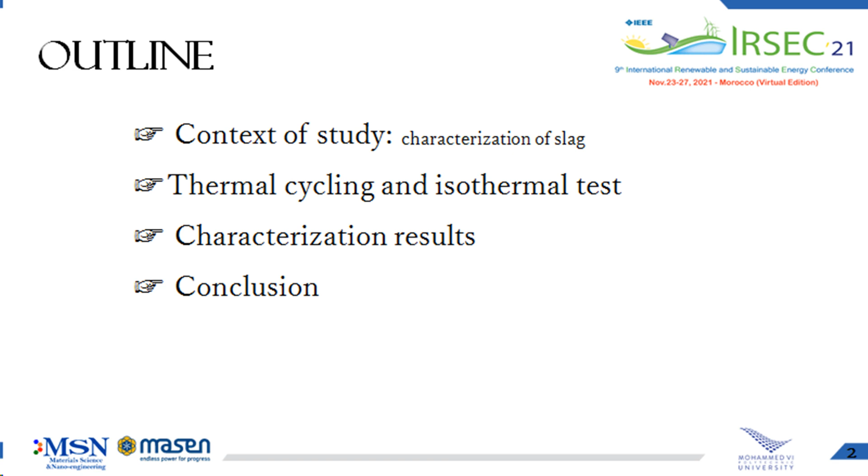First of all, I'm going to share with you the outline of my presentation. I will start by the context of study. Then I will pass to thermal cycling and the isothermal test. Then I will present the characterization result and finally a conclusion.

Thermal energy storage using sensible material is widely used to match the production and the demand on energy. In this regard, several researchers try to use byproduct materials such as slag as sensible material because it's available and low cost, and checking their thermal and mechanical stability for the cited application is mandatory, and our work stands on some uncovered points after thermal cycling of the material.

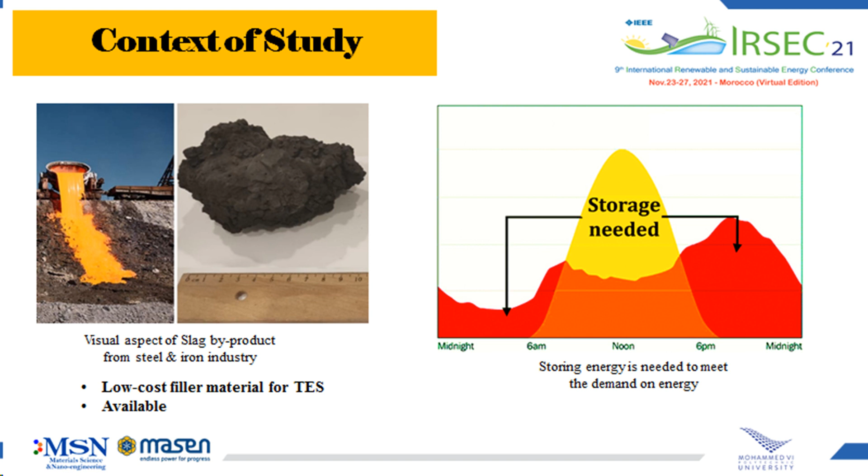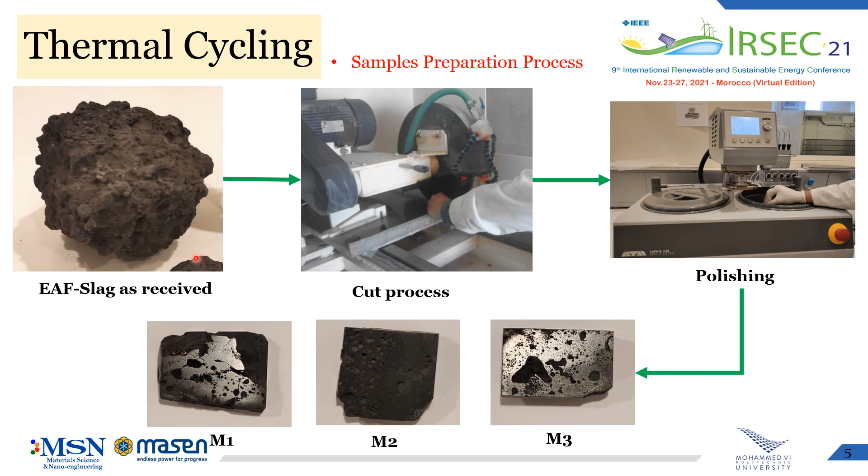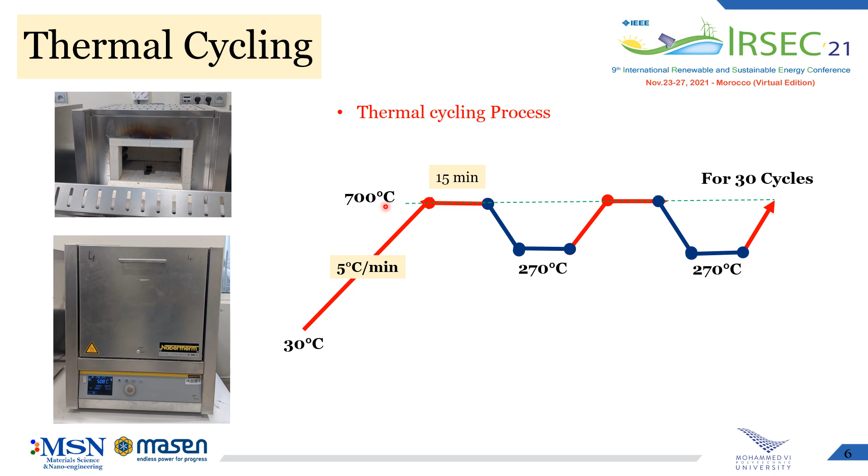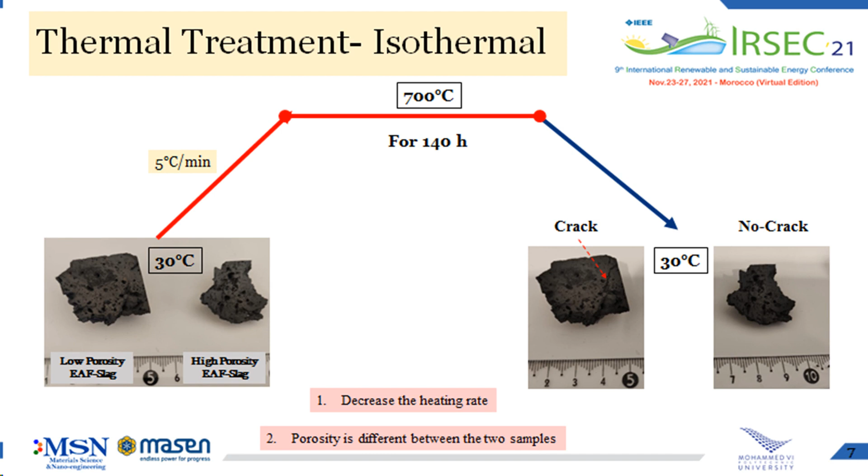In the second study, we have performed an isothermal study for 2 different porosity samples at 700 degrees C for 140 hours. The results show that one sample has cracked while the other with the high porosity doesn't crack. We can conclude that the heating rate is too high and causing the pressure increase of gases inside the material which leads to the cracking. Therefore, porosity beside the heating rate has an influence on the thermal stability of the slag material.

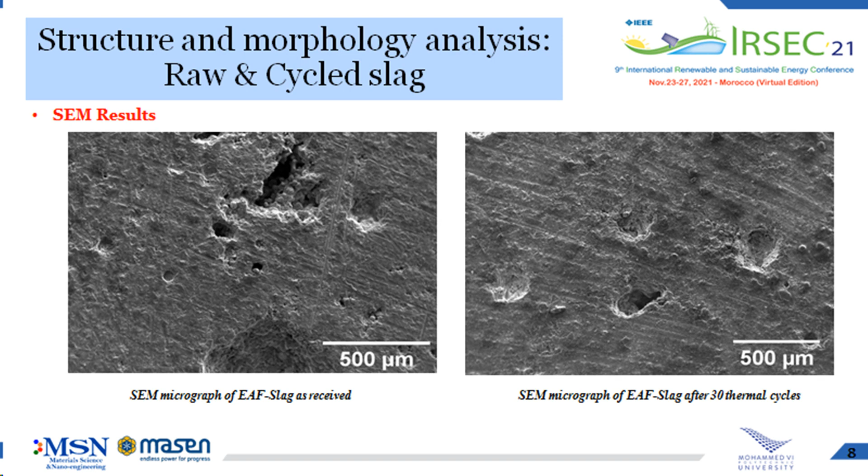The visual inspection is not enough, so we have prepared 2 different samples, one as received and the other after thermal cycling for the SEM analysis. No further cracking or morphologic modification were detected. The XRD analysis for the received slag shows 4 main phases, which are magnetite, wüstite, gehlenite, and larnite. After thermal cycling or isothermal test, the wüstite phase disappeared and the intensity of the magnetite peak increases, which means that the wüstite has oxidized and turned into magnetite, which made the material more thermally stable.

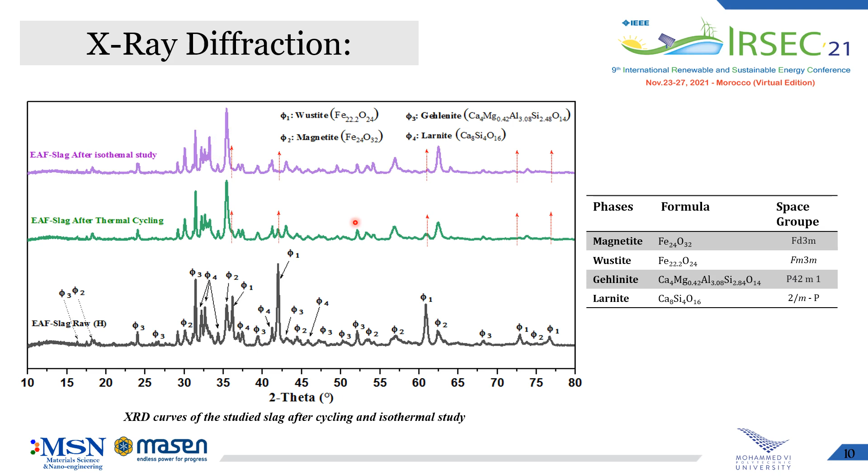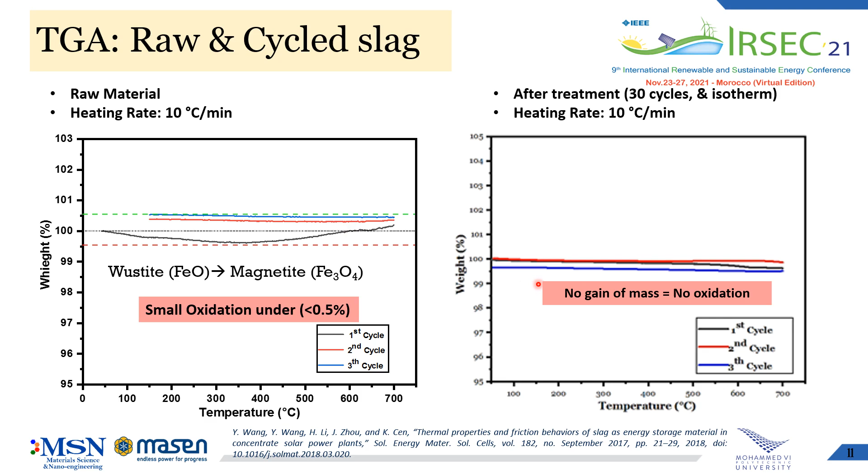And that was confirmed by TGA analysis, where we have a slight mass loss in raw material due to the evaporation of volatile compounds, followed by a gain of weight due to the oxidation of the wüstite phase. After thermal cycling, we didn't detect any significant gain of weight, and that means that we have no oxidation, therefore the material can be considered thermally stable.

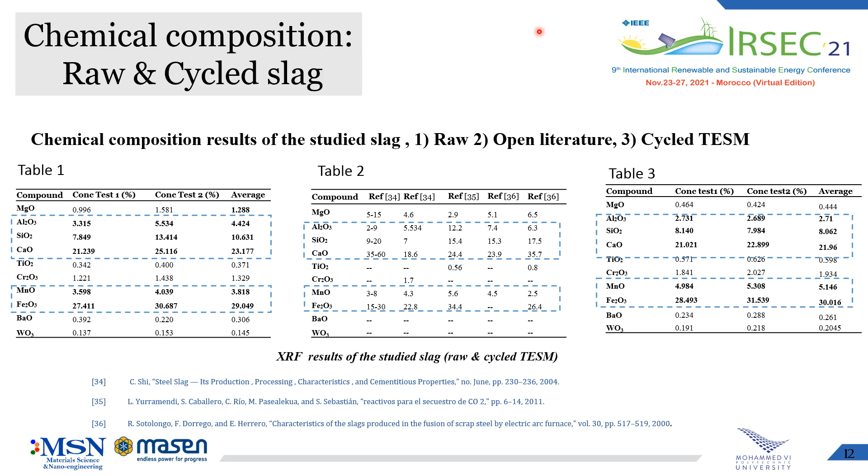The XRF analysis shows the chemical composition of the slag material in the first table. The major compounds are aluminium, silicon, calcium, and iron in the form of oxides. This composition is in good agreement with similar slag material reported by the literature from other industries. After thermal cycling of the slag material, we have a slight variation of the chemical composition, and this is due to the oxidation of wüstite.

We have measured also the specific heat capacity experimentally using the DSC technique between room temperature and 400 degrees C, and we found a value of 0.85 kJ per kilogram Kelvin for the raw material. This value increases a little bit after thermal cycling to reach a value of 0.89 kJ per kilogram Kelvin. And due to the limitation of the DSC technique at 400 degrees C, the result was correlated for high temperature.

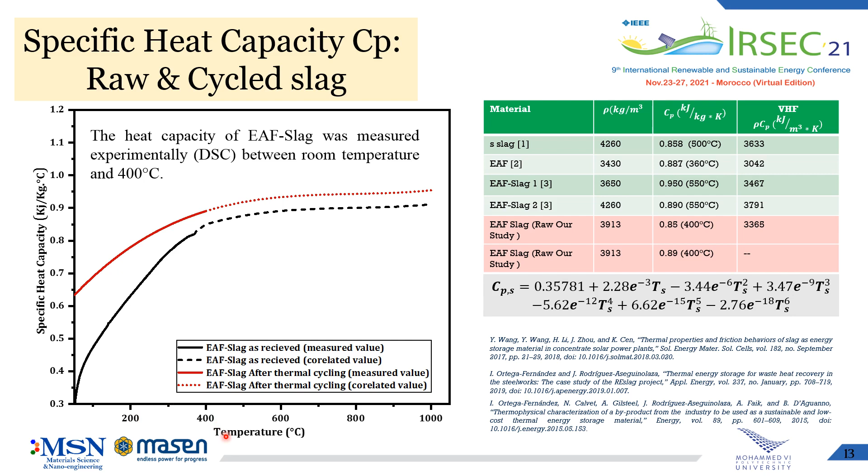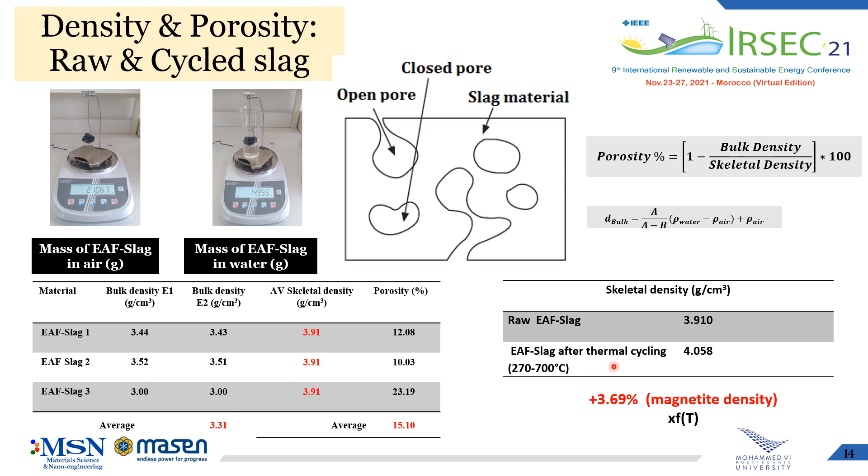We have measured the bulk density and skeletal density using the Archimedes method and the helium pycnometer method. We found a value of 3.3 grams per centimeter cube for the bulk density and 3.9 for the skeletal density. Then the porosity was calculated using the following equation. We found a value of 15%. After the thermal cycling, the skeletal density increases, and that's due to the magnetite density being higher than the wüstite one.

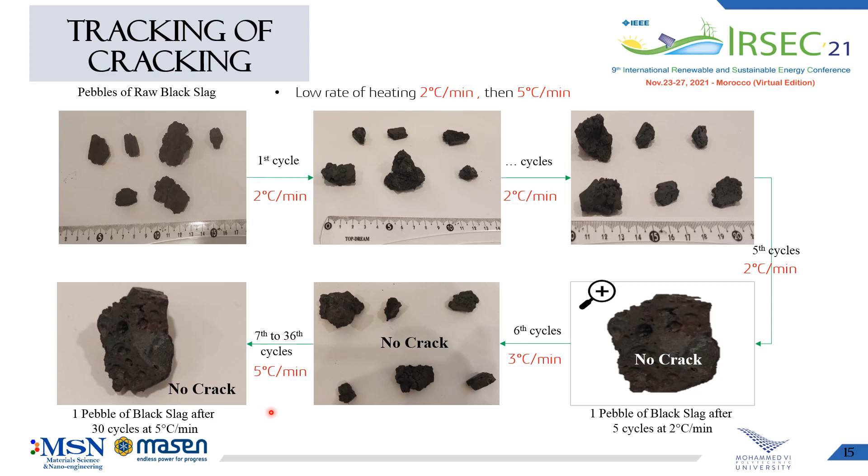Regarding the cracking issue, we have shown that the high heating rate leads to the cracking because of pressure increase. In this study, we have used a low heating rate of 2 degrees C per minute followed by 3 degrees C per minute to ensure that all the gases escape without increasing the pressure. Therefore, no cracking was detected for the first 5 cycles. Then we have increased back the heating rate to 5 degrees C per minute for the remaining cycles, and also no cracking was detected.

Thermal energy storage is a promising technique for the recovery of a huge quantity of waste heat generated by industries during their activity. And the electric arc furnace slag byproduct presents good thermophysical properties, even though the material shows no cracking behavior during the thermal cycling and the isothermal test. The only thing we recommend is a slow heating rate during the first few cycles to ensure thermal stability of the material.